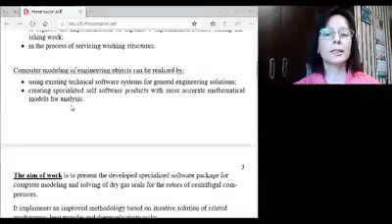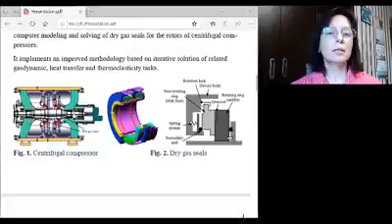for the rotors of centrifugal compressors, which maintain gas pressure in main gas pipelines. The aim of this work is to present this software package.

Such dry gas seals have been widely applied due to a number of advantages. The main ones are the possibility of operation at high rotation speeds for compressor rotors, the absence of an expensive oil supply system, and minimal gas leakage during operation. They can work stably and reliably with various gases and under various operating conditions

only in the case of very accurate modeling and solving. That is why the use of information technology for computer modeling of processes that take place during the operation of dry gas seals makes a huge contribution to the reliable operation of the system as a whole. The literature review on this topic has shown the relevance of this problem.

Despite a large number of publications on this topic, many issues of modeling and solving remain open. Many publications are devoted to the study of only one physical process that appears during the work of dry gas seals.

It is important to note that the main operational condition of dry gas seals is the existence of a necessary gap between the seal rings, with a thickness of near 3 or 4 micrometers, in steady-state operation. The gap is supported by the gas pressure, and the necessary gas pressure between the rings in working condition is created and maintained due to a special type of microgrooves on the rotating ring, with a depth of near 6 or 7 micrometers.

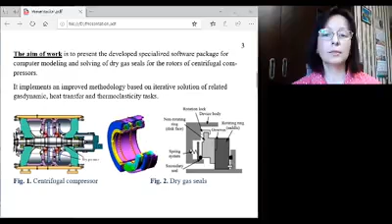In view of the very small gap between the rings, it is necessary to take into account the temperature distribution in the gas layer and seal rings, and the appearance of thermal stresses in the rings. Therefore, the developed software package implements an improved methodology based on iterative solution of related gas dynamic, heat transfer, and thermoelasticity tasks for dry gas seals under steady-state operating conditions.

Let's consider the mathematical models of the processes mentioned above. The distribution of gas pressure in the gap between the seal rings is described by the nonlinear gas lubrication equation. The temperature distribution in the gas layer between the rings is described by the heat equation. These form the basis of the developed specialized software package, called GasDin.

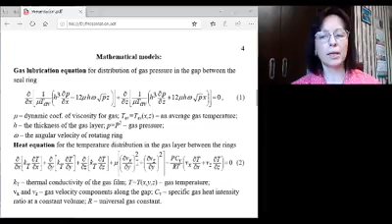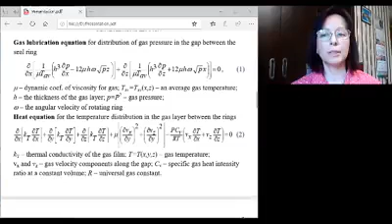A special algorithm based on the use of the Bubnov-Galerkin method in combination with the finite element method has been developed for the solution. Because of the non-linearity of the formulated tasks, an iterative algorithm for their simultaneous solution has been developed. This iterative algorithm is carried out by the developed package GasDin.

The conversion of huge analytical expressions of the mathematical model was made using a package of computer mathematics. These expressions were automatically translated into C++ programming language code. Thus, it was possible to avoid numerous mistakes. Analytical expressions were also used in testing to compare the results of calculations. This software package has been developed using the C++ programming language.

Block scheme and the main window of software package GasDin can be seen on Figure 3. The main requirement for the service part of the software package was the creation of an on-screen menu with corresponding buttons allowing management of a standard set of work with files and program modules, various forms of data input and output, and visualization of results of solutions.

It should be noted that the solution of heat transfer and thermoelasticity tasks, and the visualization of obtained pressure fields and gas velocities, are carried out using a universal finite element software package. Data exchange between packages during the iterative process is carried out by specially designed programs.

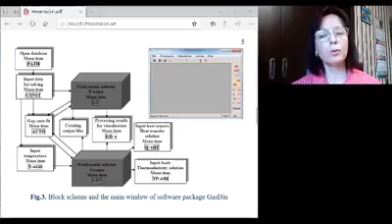After the gas dynamic solution, the intensity of heat sources in the gas layer is calculated and exported into the database to solve the heat transfer problem. Further, the temperature fields of rings and pressures in the gas layer are exported into the corresponding databases for solving the thermoelasticity task. The calculation of the working gap, taking into account the obtained strains of seal rings, is also performed automatically.

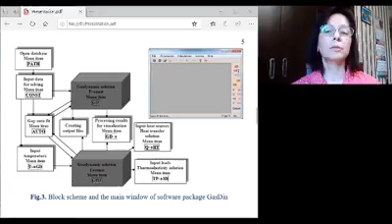Testing of the created software package GasDin was carried out by solving test tasks for special cases which have an analytical solution, such as the distribution of gas pressure in the gap without grooves, and it shows good agreement with the obtained results.

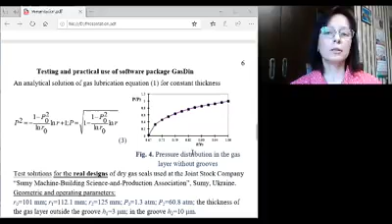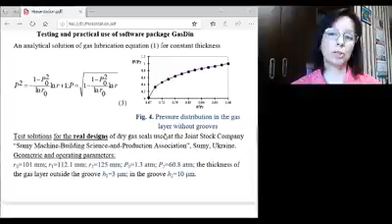Also, test solutions were compared with solutions in literature and experimental studies. As for the real designs of dry gas seals, tested solutions using the iterative algorithm were carried out for the designs of dry gas seals used at the Joint Stock Company Sumy Machine-Building Science and Production Association. Geometric and operating parameters of the seal are presented here.

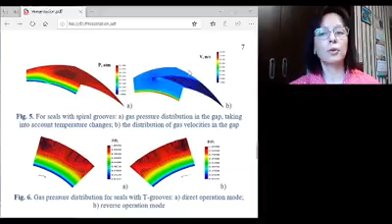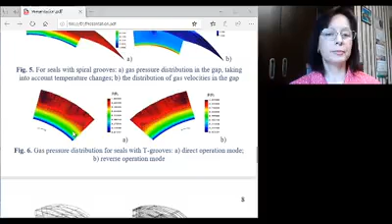Test results are in good agreement with those available in literature. To determine the strain state of seal working rings, three-dimensional ring models are used with the conditions of cyclic symmetry, shown in Figure 7.

The gas leakage obtained by the developed software package is presented here. It should be noted that the Joint Stock Company Sumy Machine-Building Science and Production Association has created an experimental stand for the study of dry gas seals. It determines the inlet and outlet pressure in seals, the gas velocities, the temperature around seal rings, and gas leakage through the seal.

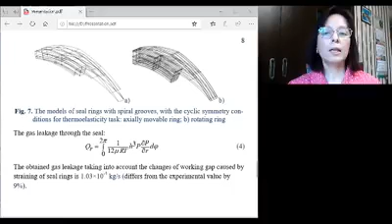The calculated gas leakage differs from the experimental value for the seal by 9%. It can be considered a good result. The heat transfer modeling for seal rings is done in an axisymmetric setting.

The resulting distribution of temperature is shown in Figure 8. Experiments for the studied seals showed that gas in the gap heats up on average to 40-50 degrees in the absence of contact of surfaces. As a result of computer modeling, the gas at the outlet is heated up to 46 degrees for these seals. That is in good agreement.

The test modeling and solving confirm the reliability of results obtained using the developed software package GasDin.

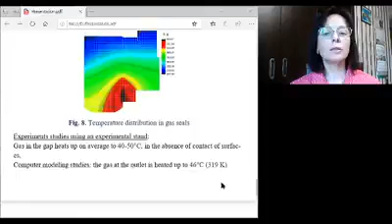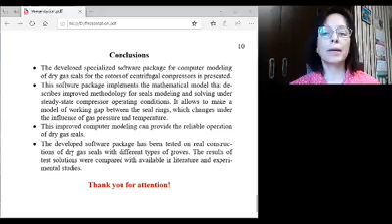Conclusions on the work: a developed specialized software package for computer modeling of dry gas seals for the rotors of centrifugal compressors is presented. The software package implements the mathematical model that describes an improved methodology for seal modeling and solving under steady-state compressor operating conditions. The developed software package has been tested on real constructions of dry gas seals with different types of grooves. The results of test solutions were compared with those available in literature and experimental studies.